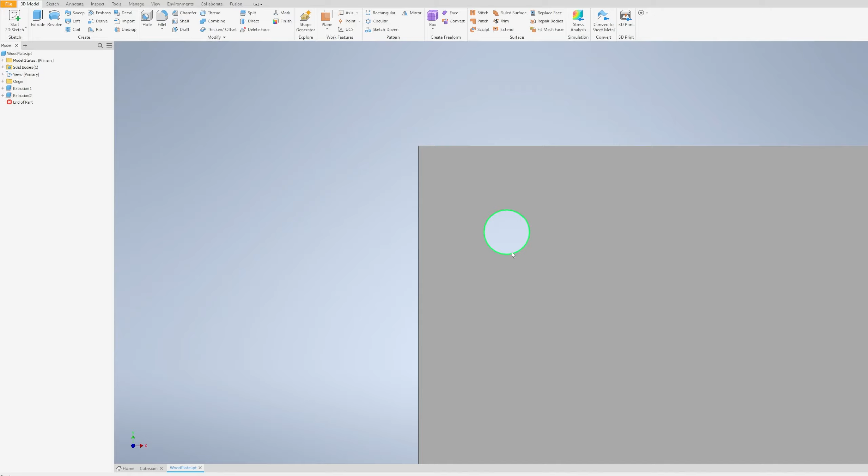I'm also not using any kind of structural component like metal or aluminum brackets like Mr. Volt did. So these screws are going to be load bearing. Don't sit on it. I then modeled the corner and edge pieces, which give that cube the iconic Aperture look. These aren't based off of game models or anything. I just used a single reference image and kind of eyeballed it. So it won't be perfectly accurate, but it looks close enough.

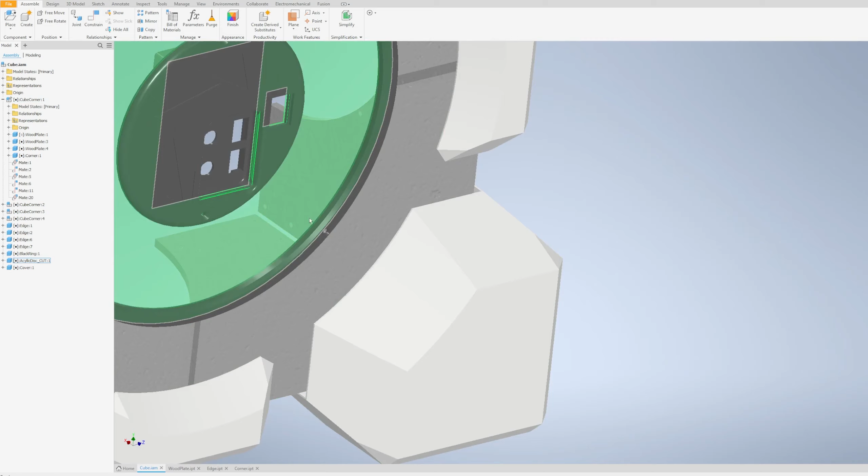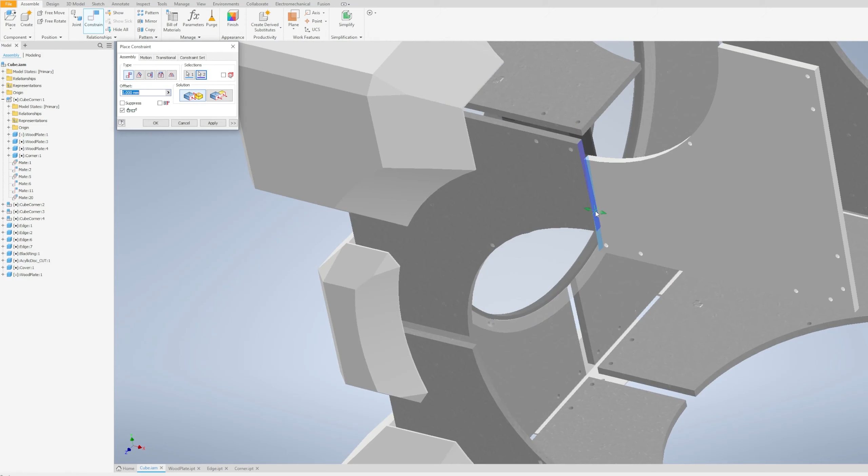I started virtually assembling everything, including the black transition ring, the acrylic disc, and this electronics control box. I also constrained all the edges to make sure that the screw holes lined up properly. I'm not really sure why Inventor makes this noise when you constrain an assembly, but it makes me laugh every time. Like, what the fuck? I also set up the print job. I also tried to optimize the amount of filament that went into this because it uses quite a lot.

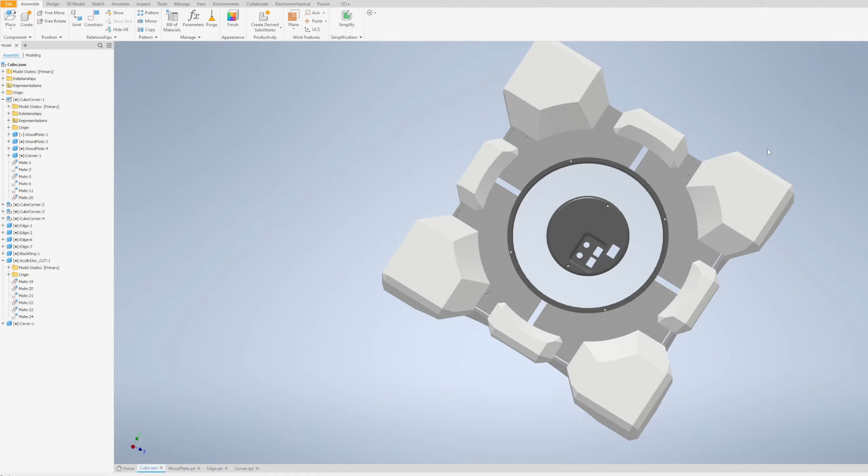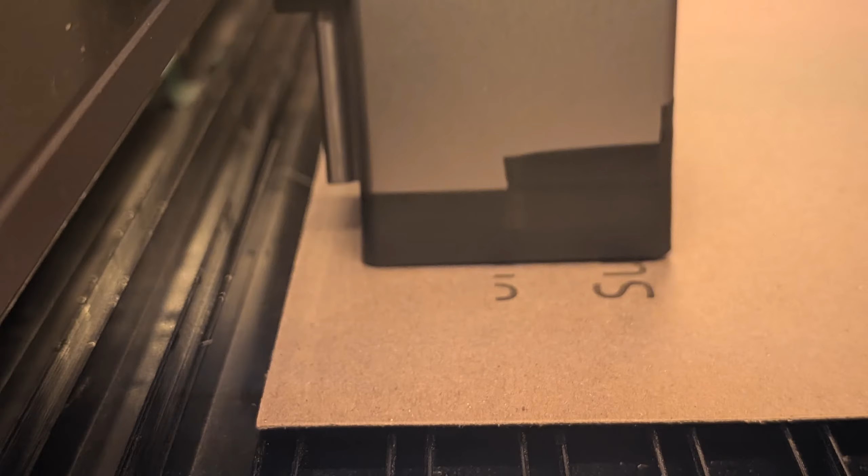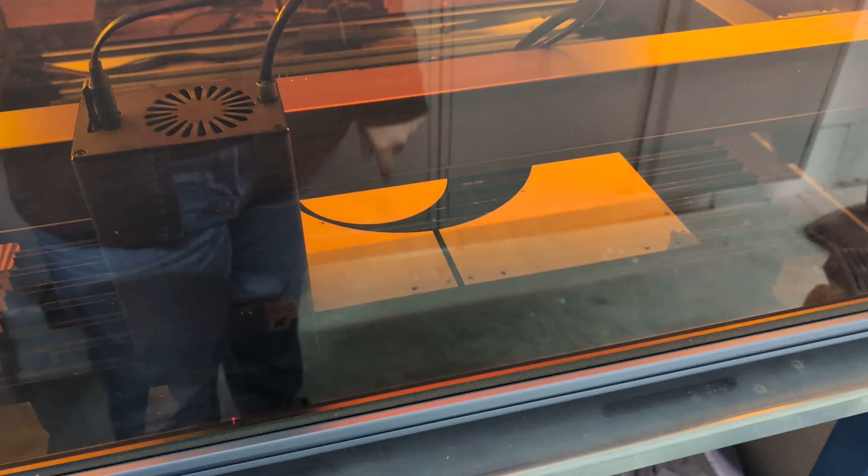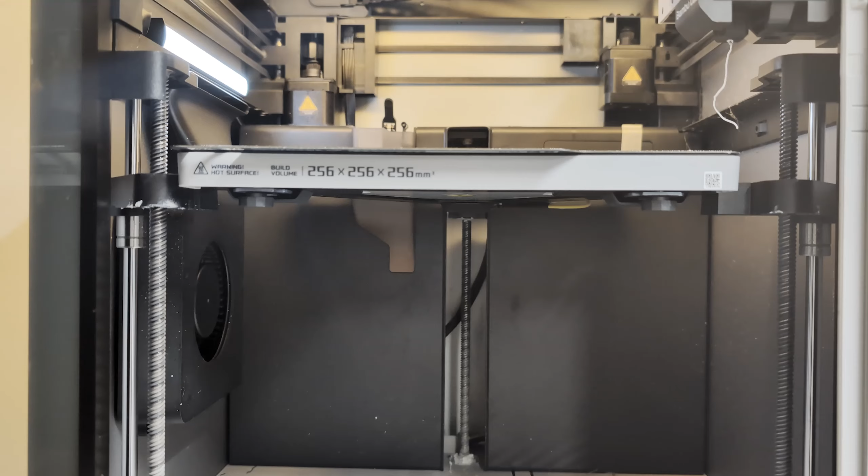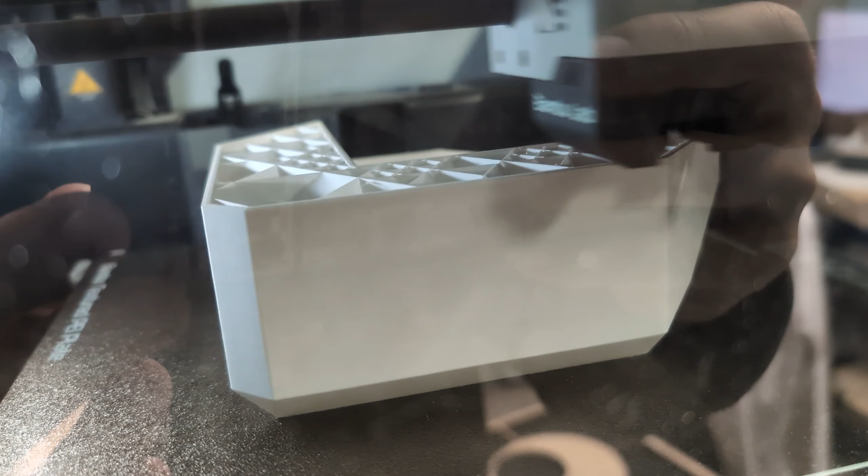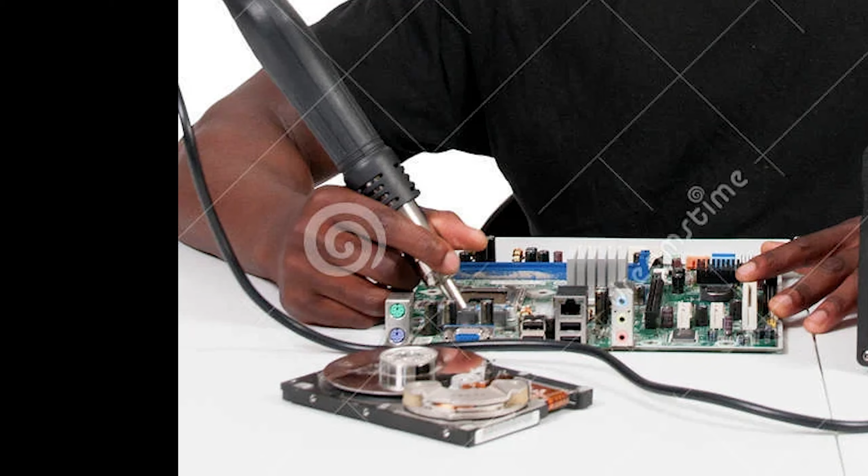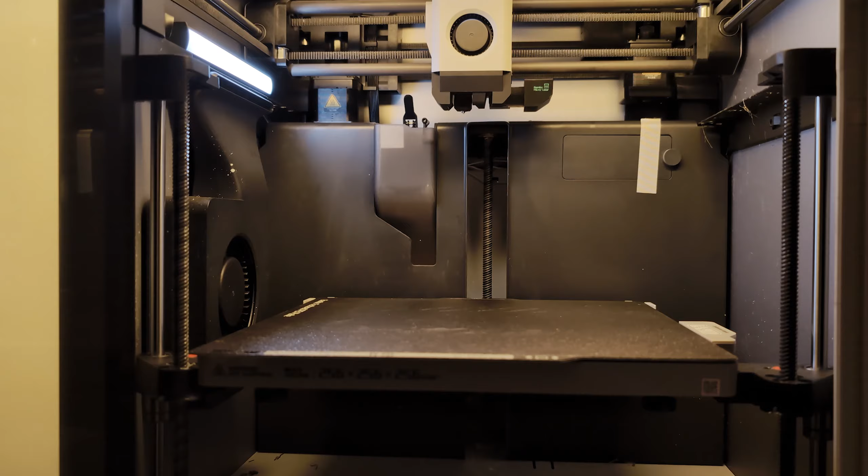While that's reprinting, I brought all the wood pieces outside to sand, prime, and paint them. I really wanted to get this lunar gray paint, but it was glossy and I needed something matte to match the style of the cube. I also lasered out these cool Aperture logo stencils for the circular parts, which worked surprisingly well. Doing all this really makes me wish science is a real thing instead of a mental illness. Hey, nice one. Although I am going to need at least 14 more of those, so good luck.

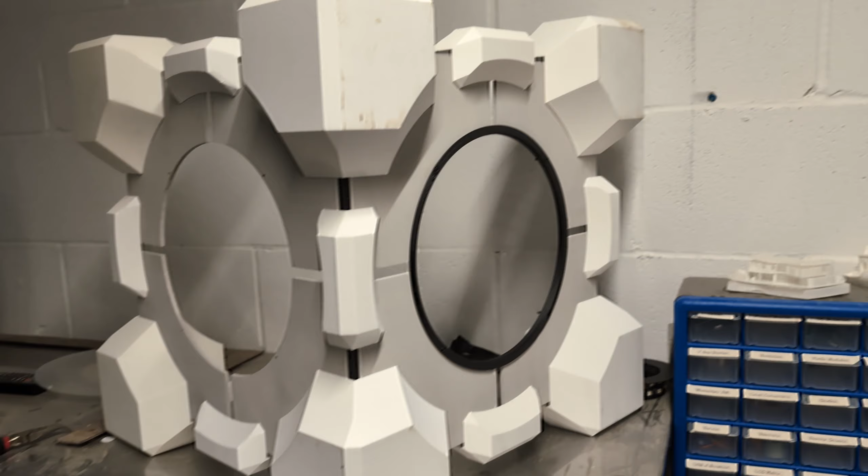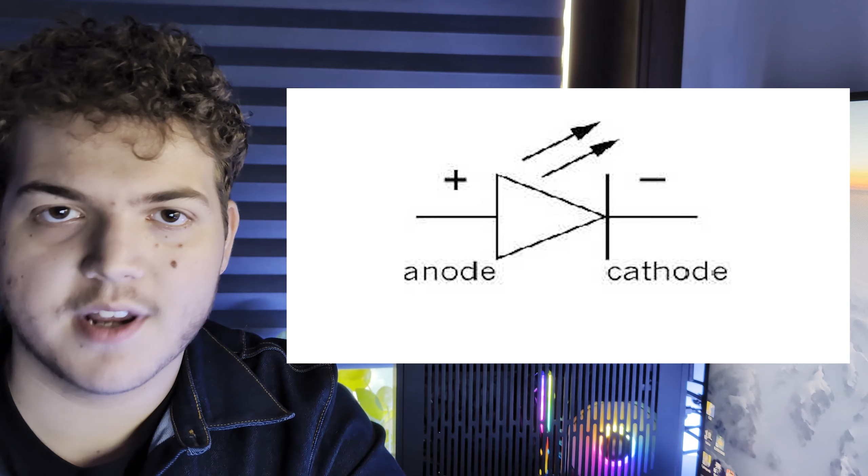Hey, the cube looks like it's coming together pretty nicely. There's just one more thing I have to figure out, that being the glowing disc in the center. I've had the general idea of using LEDs to create the different color glows that we see in-game. But aside from the electronics, I don't really know what the best way to diffuse that light would be.

Bare LEDs look really crap when you look directly at them, so most products that use them have some kind of diffuser that spreads the light so that you're not looking at hot spots. I decided on using acrylic as my generic transparent material and then frosting it somehow to smear the light around. Putting the frosting aside, I need to find a way to take the acrylic and turn it into a useful shape. My first thought was the laser because that's pretty much designed for turning flat things into differently shaped flat things. There's one small problem with that though.

My laser is what's called a diode laser, which means it operates in the visible light spectrum. Now to show you why that's a problem, let's take a look at a little bit of acrylic. If we do the math, we can perform a proof by it's fucking obvious and see that the acrylic is see-through. Also known as, the laser just passes right through it and doesn't heat it up. Why is that a problem? Because the only reason the laser works at all is because it heats stuff up. Now there are lasers that actually can cut acrylic, called CO2 lasers, but I don't have one of these.

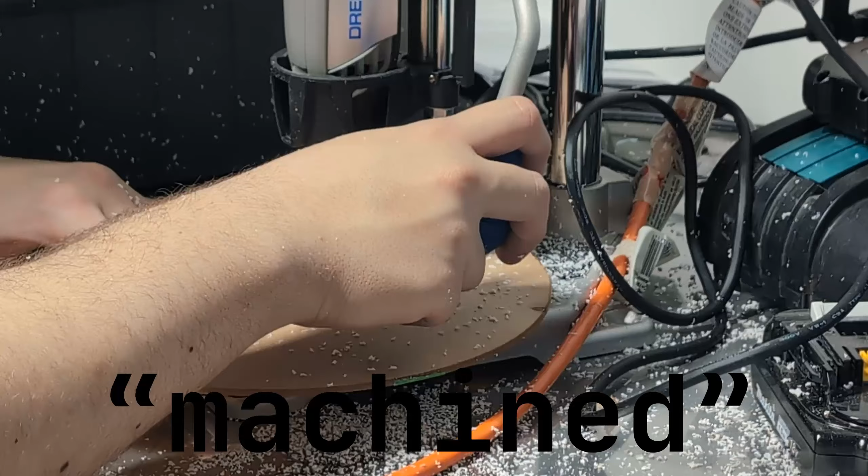Stuck with no other options, I decided to do the impossible. I looked it up on Google and found a disc that just so happened to be the exact same size that I needed on Amazon. And now I have some machined acrylic. Frosting time. Sanding acrylic by hand can be a good way to frost it, but I wanted it to be a really even frost, so I used an orbital sander. This ended up working so well you might confuse it for a whole ass job.

Okay, just one more thing to take care of before the cube is done. Electronics! The cube is going to have lights inside it, and I need a way to control those lights, make them brighter, dimmer, different colors. I picked out these RGBW LED strips that include an extra white LED to make the white light it produces a much higher quality. The way these strips work is you pass 12 volts into this common 12 volts pin, and then you pull whichever color you want to ground, and it will activate that series of LEDs by completing the circuit.

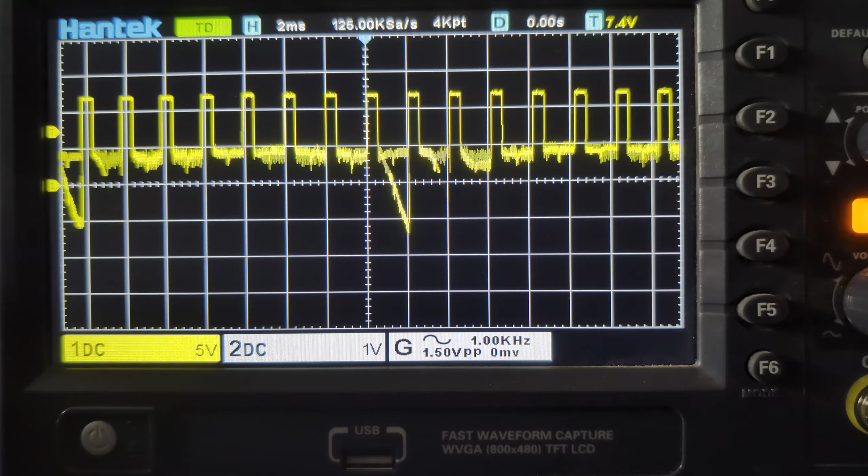Controlling LED brightness is a little bit tricky. You need to do something called pulse width modulation, or PWM. PWM is essentially turning the LED on and off really fast. Really fast. So fast that you can't even tell that it's turning on and off. Think of a computer fan like this one. Once it's spinning up at a certain speed, you can't even see the blades anymore. You kind of just see a circle. It just so happens, in our case, we can also use this to make the LEDs appear as though they're dimming. To produce a dimming effect, all we have to do is change the ratio of time spent on versus time spent off.

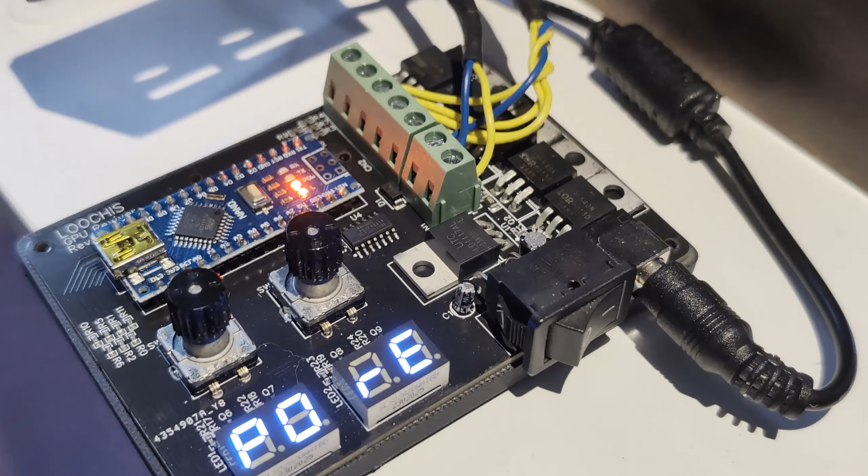To put this to use, I designed a PCB where an Arduino controls a high current MOSFET. The MOSFET just connects one of the LED pins to ground. There's one MOSFET per channel and an auxiliary one in case I want to power something else. Slap on some cool 7-segment readouts and write some code to control these rotary encoders to control the brightness, and we have a working electronics control system.

I then soldered some wires to the ends of the strips so that I can plug them in. That task is definitely what I'm going to do in hell forever. And with that, I can create a nice cable management system where the control signals go out and then get distributed to every single face independently.

The first version was better.